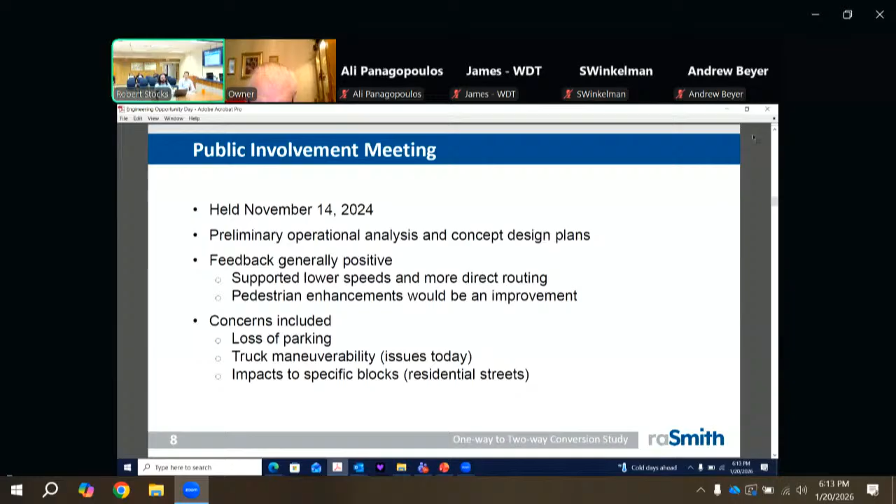I mentioned the public involvement meeting. We held that in November. Again, preliminary operational analysis and concept design plans were presented there. Feedback received at the public information meeting was generally positive, and supported the potential for lower speeds, the more direct routing, the pedestrian improvements. We noted some of the concerns at the public involvement meeting: the potential for loss of parking, truck maneuverability. Some noted issues even today just trying to move trucks on and off between 4th and Main. And then, in general, some of the specific blocks, specifically on the residential streets, that might have some operational changes.

So looking at the existing one-way system, on the map here, everything in green is a one-way street in that study area. And this is showing it's a relatively extensive one-way pair system. But really the takeaway here is that it's discontinuous through that system. So you've got sections that are two-way in between one-way segments, and that's adding to that confusion and the potential for wrong-way movements. I mentioned in one of the previous slides that convert or revert. So the one-way system was originally implemented downtown in the mid-1970s to address what at that time was noted as increased traffic volumes and congestion.

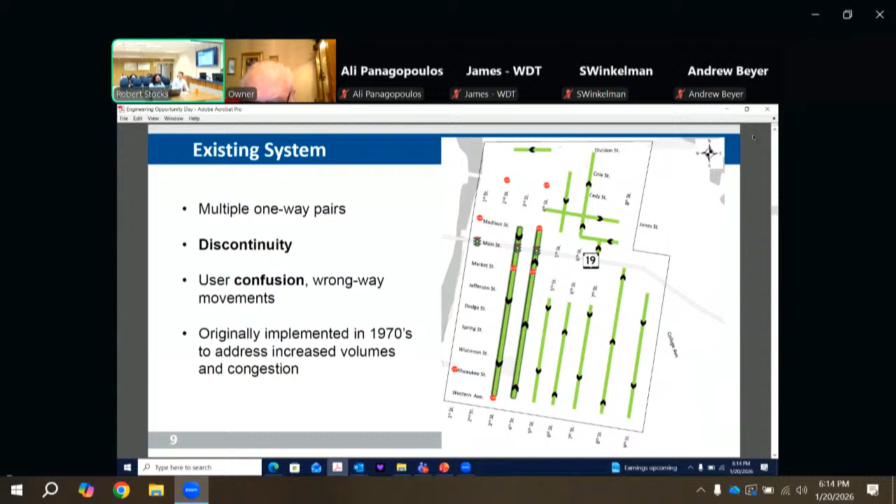So this slide highlights some of the existing daily traffic volumes, and I just wanted to highlight a couple of the locations. So the green lines on this slide are the 3rd and 4th Street corridors and the two signalized intersections with Main Street. So WisDOT, or Wisconsin Department of Transportation, collects daily traffic information and reports it, and their most current information is reporting 8,500 vehicles per day on Main Street, and then 3rd and 4th Street ranging between 1,600 to 2,700 vehicles per day.

But to put that into some context, a typical 2-lane urban street capacity from a daily standpoint can be between 6,500 and 10,000 or more, just depending on the specific cross-section. The more parking and traffic calming, that kind of stuff is going to reduce that capacity, but typically that's kind of the range you're looking at.

Also for comparison, like 1st Street, Cady Street, some of the existing two-lane roadways, they're carrying between 4,000 and 6,000 vehicles per day. So what we're kind of taking away from this is that 3rd and 4th Street are significantly underutilized today for multi-lane roadways operating as a one-way pair.

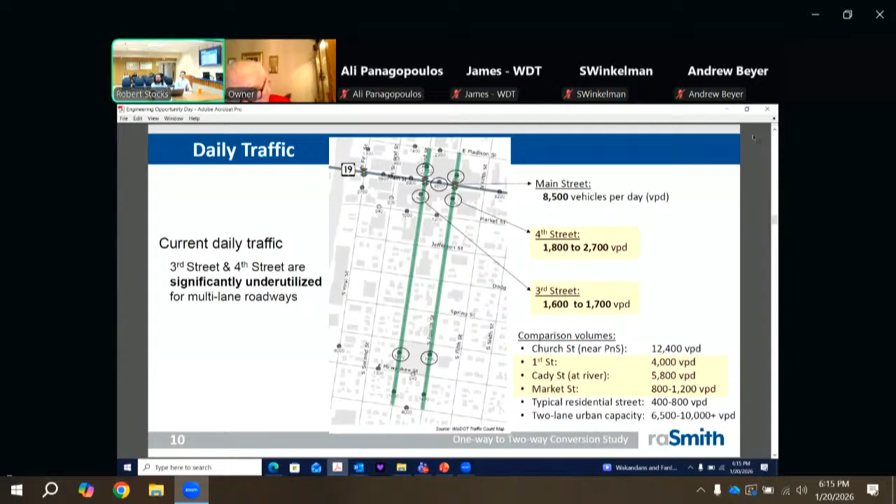Another note on the daily traffic. So we worked with the state to pull historic data. Again, they collect data every 3 years or so, but they had data dating back to the late 1960s here. So this is showing a few data points. Down here on the bottom right is Main Street, kind of since 1969 through 2022, and then the other locations are on 3rd and 4th Street.

And kind of the takeaway here is just from about the early 90s when the traffic volumes peaked, there's been a downward trend since that time, and volumes today out there are about one half of what they were from that peak period.

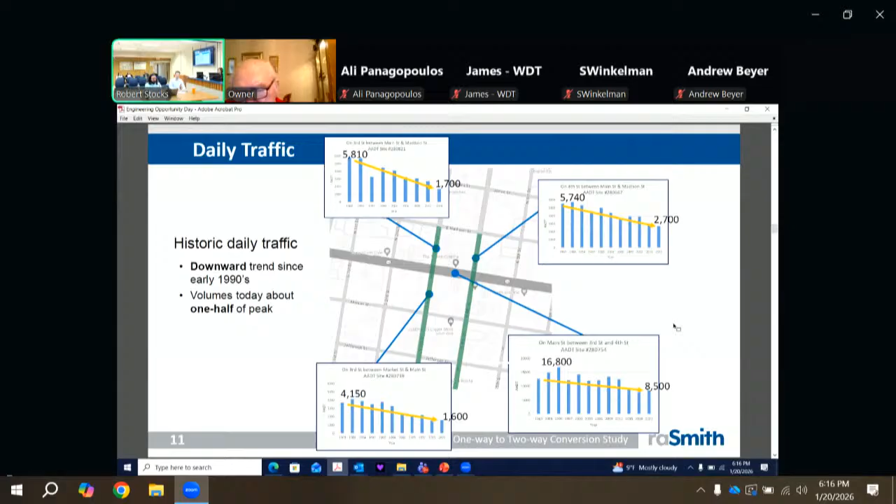Also part of the study, we conducted a crash analysis in the study area. Again, more detail in the report, and we can revisit anything you need questions on, but a couple maps just pulled from our crash evaluation. So the one on the left is a dot diagram of all the reported crashes during the most recent 5-year period when data was available.

There were 331 crashes reported, and the most common crash type was what we call an angle crash, or a turning vehicle colliding with a through vehicle or another turning vehicle. So potentially pointing to, again, kind of those additional turn movements that people need to take with the one-way system.

The figure on the right is showing a few specific crash types. So the orange dots are head-on crashes, so front-to-front vehicle crashes. There was one reported on 3rd Street and one reported on 4th Street, again, potentially with wrong-way movements. The yellow and blue dots are pedestrian and bicycle crashes during that period of time. Not a ton reported, but they are happening within the study area.

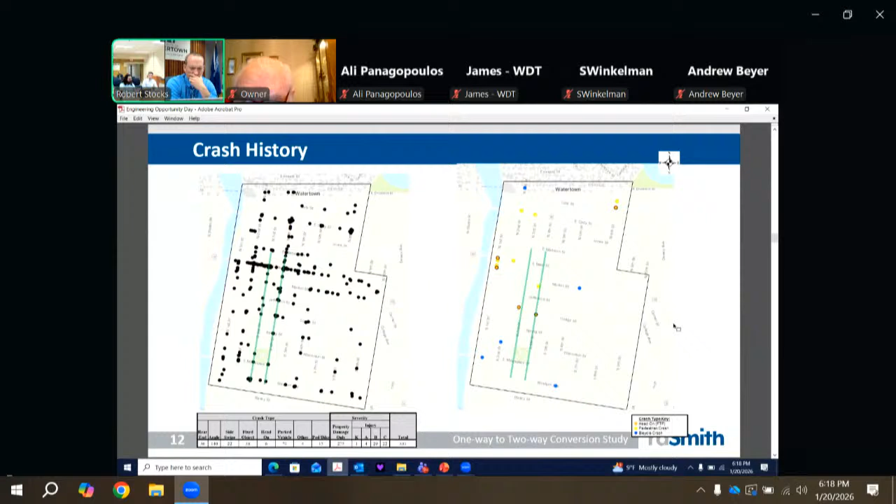So I mentioned the kind of more complex nature of 3rd and 4th Street, which required a more detailed operational analysis to test that two-way configuration. And specifically, we were looking around the signalized intersections on Main Street, kind of one block north and south, and then a few blocks east and west on Main, to really kind of nail down what would that operational condition look like under two-way configuration.

We utilized the Highway Capacity Manual, or what we call HCM, the nationally recognized methodology for operational analysis, and Synchro traffic analysis software to conduct the analysis. And as I said, trying to stay high level, but the models, the analysis is showing acceptable operations on 3rd and 4th Street as two-way. And we did do surplus capacity tests as well.

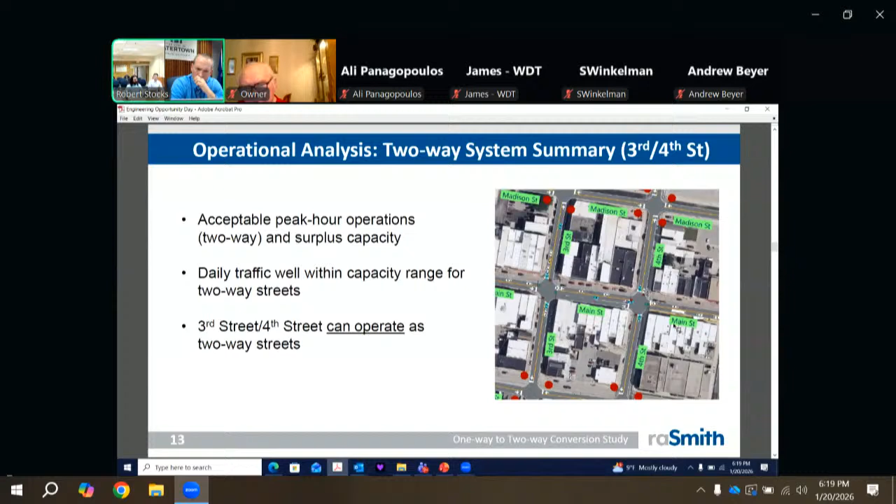So we took the volumes that were collected, redistributed them to two-way, and then increased them 15%, increased them 25% to kind of stress test that system. And we were finding even at those increased levels, there was still acceptable operations. So expecting surplus capacity if those volumes do kind of rebound in the future. And I mentioned the daily traffic is well within those capacities for two-way streets.

Diving into a little bit more detail, this shows kind of a by-movement operational analysis at the two signalized intersections with 3rd and 4th. The Highway Capacity Manual reports based on a level of service. They give it a letter grade between A and F, and it's associated with an amount of delay. So how many seconds of delay does it take to move through an intersection?

And there's a chart there on the right that kind of correlates those delays to a letter. And just generally industry standard here, we consider level of service D as acceptable, D or better. So here we're seeing all levels of service are C or better under the two-way configuration.

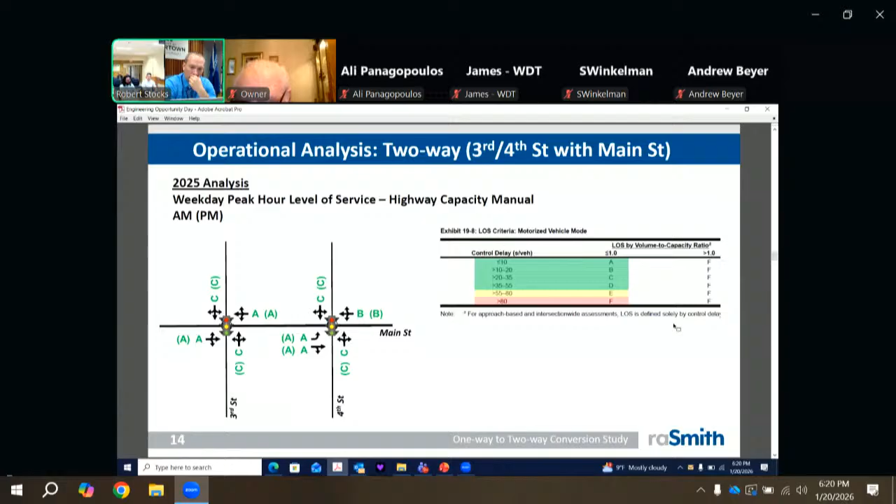All right, so we had mentioned the three alternatives we had looked at for left turns. We also utilized simulation software to help us with this left turn evaluation. Today, Main Street doesn't have left turn lanes except eastbound at 4th Street, so traveling east to north from Main to 4th, there's that full block length of left turn lane. Otherwise, there are no left turn lanes on Main.

And the HCM methodology doesn't really fully capture that short-term impact, so that's where the simulation helps us. And we were looking at what those trade-offs are. If we provide additional left turn lanes, it's going to improve traffic flow and reduce queues, but that's going to come at an impact to the cross-section, right? We're going to have to find space to add additional lanes, and that would impact parking.

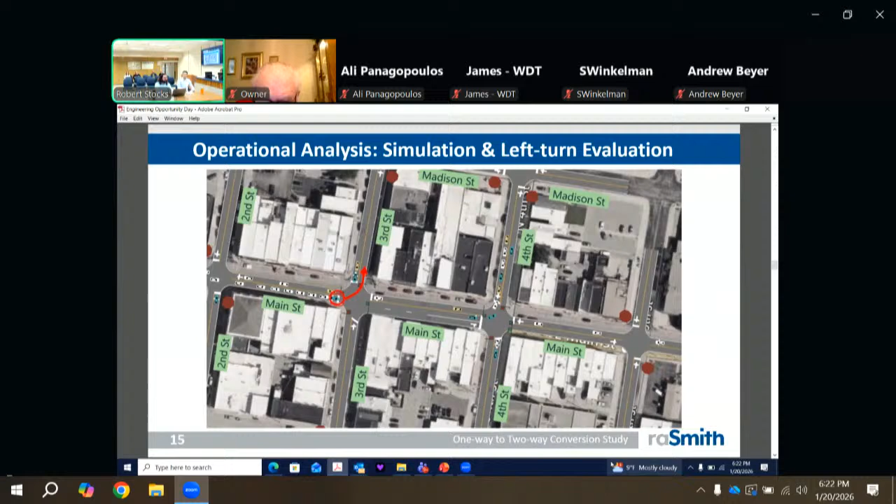So takeaways here. Between the two signals, specifically westbound heading from 4th Street to 3rd Street on Main, we're seeing queues that fill up about 80% of the available storage internal between the two signals. And then looking at what I'm calling external to the two signals, so westbound on Main Street from 4th and eastbound on Main Street from 3rd, those queues are backing up to or through the 2nd Street and 5th Street intersections. This alternative has the longest queuing reported, but it doesn't impact any additional parking.

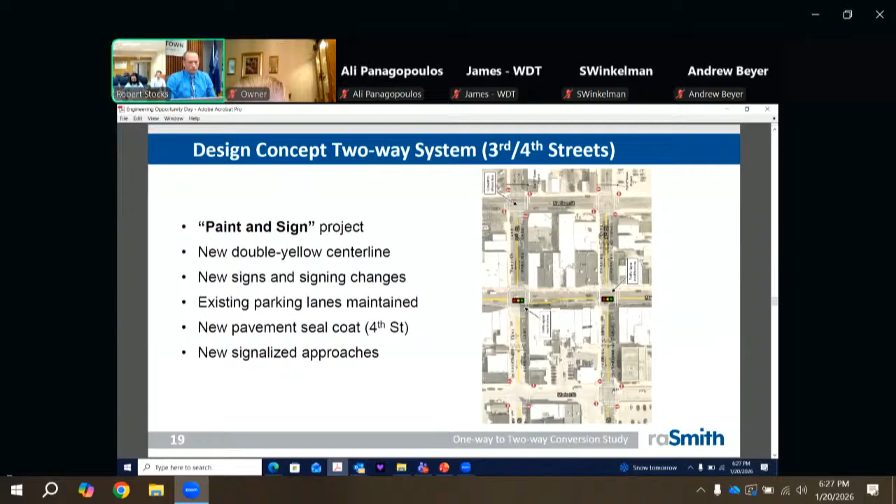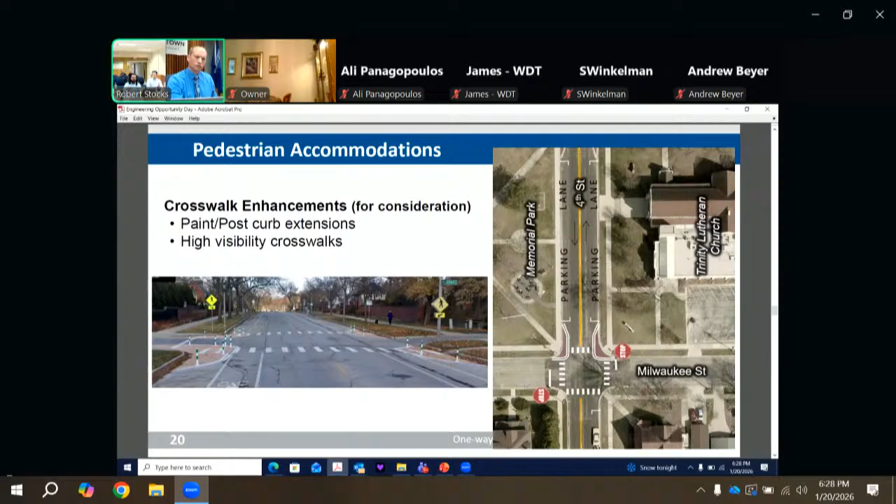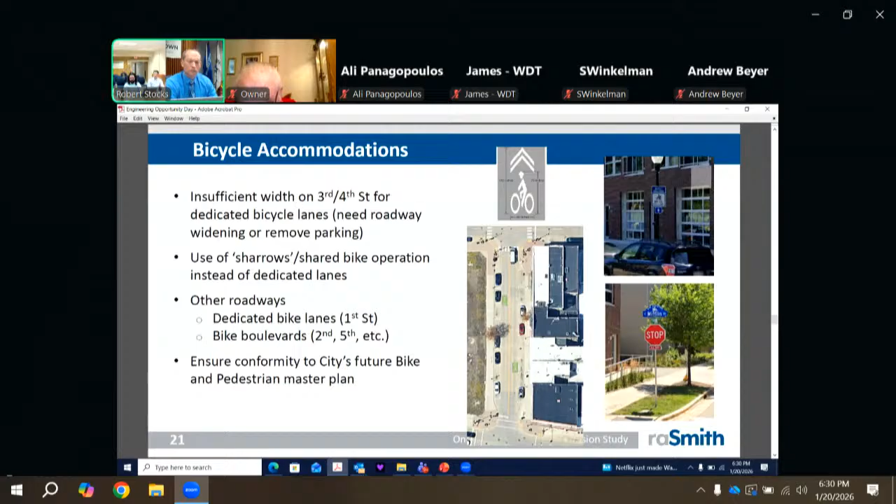So we looked at some other potential options to provide that north-south bike connection, and it could be looking at dedicated bike lanes on other streets. So like 1st Street has a wider cross-section, could be an alternative, or looking at some of the residential streets, so 2nd, 5th through 8th. Do those get dedicated as what we call a bike boulevard? So it would be signed and marked as bicycles having the right of way to provide that connection between like Western and Main. But again, provided to the city for consideration, but any changes, any additions would need to conform with the future ped and bike master plan.

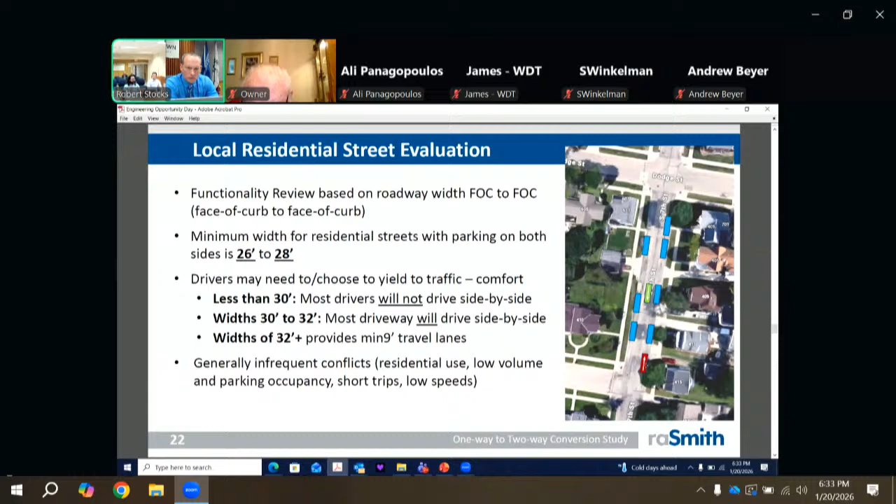When you hit that 30-foot width, between 30 and 32 feet, I should say most drivers there will drive side by side. It's narrow, they'll go slow, but there's enough space for most drivers to go side by side. When you get to widths of 32 feet or more, then you've got enough space for 7-foot parking lanes and 9-foot travel lanes. And drivers would treat it as a normal two-way street.

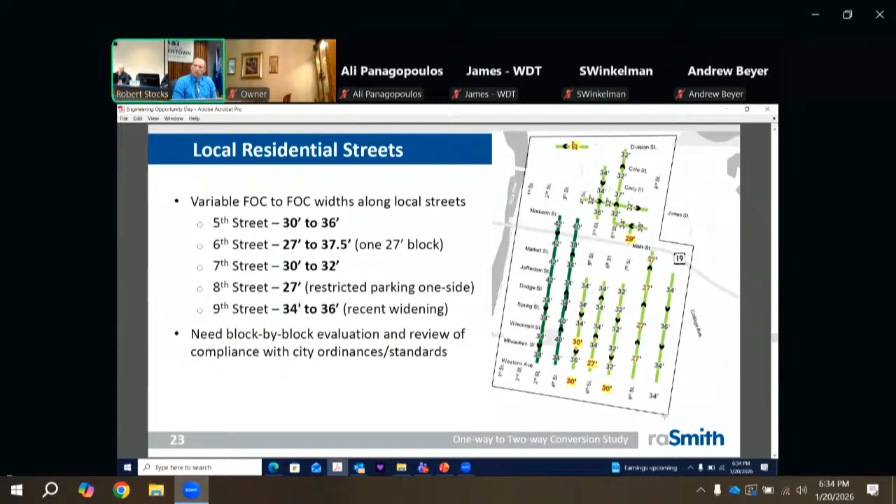Just a minute here, if you could, please. Yep. But where you have like 30 to 36 or 27 to 37, are you saying on that street at different points it has different variance in width? I don't quite follow the range you're referring to. Because I know we have streets that are wide and narrow depending on where you are on the street. Is that the example there of that street?

Yep, so like 5th Street, what I'm saying here is the widths vary between 30 feet and 36 feet, depending on which block you're on. Between Western and Milwaukee, the width is 36 feet. But between Milwaukee and Wisconsin, the width narrows to 30 feet. And then Wisconsin north, it's 34 feet. So there's not consistent width as you're going north to south.

So like I said, on the whole, there's 32 feet or more for most of these block segments. And they would be able to operate as two-way streets with a little bit more narrow conditions. And parking on both sides. Parking on both sides, yep. So in these narrow sections where it's 30 feet or 27 feet, you would probably see more drivers choose to not drive in opposing. They would wait at the end of the block, or if there's an open parking spot, they'd pull over and wait there.

One of the benefits here, the street blocks are pretty short in this section. They're only like 200 feet long, so it's not like you'd need to wait 45 seconds for a car to clear it. They can clear through the intersection pretty quickly. And there's not enough ability within that boulevard or right-of-way to try to make it consistent on a certain width? You don't have that latitude or that option?

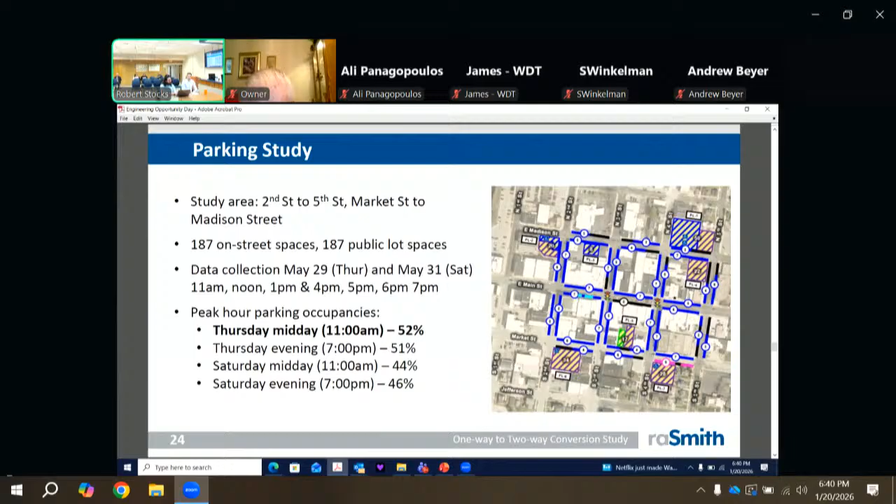And then in the evening, more of the restaurant, entertainment type business, people trying to park right in front of those businesses, and the 2-hour restrictions aren't in place on street. So during the evening, a lot of the lots are underutilized.

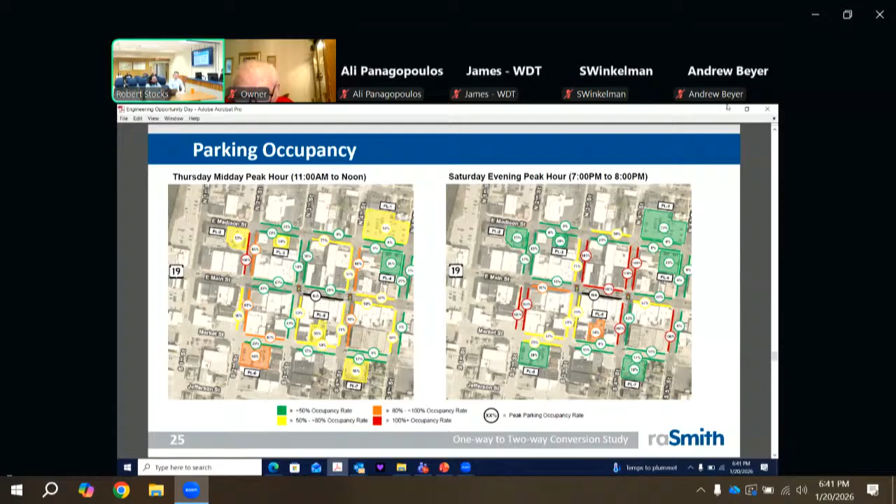Okay, so a couple slides with just kind of an overview of the recommendations. So based on the analysis and the concept designs, the study is recommending converting 3rd Street and 4th Street to two-way streets with one through lane in each direction.

For the 3rd Street and 4th Street intersections with Main, we're recommending option number 2, which had the 1 additional left turn lane, basically taking a piece of that existing left turn lane between 3rd and 4th and allowing a piece of that for the opposite direction. So that provides more storage and an opportunity for left turners between those 2 signals, but tries to limit the amount of parking impact.

Generally, the existing signal operation would be similar to today. So the new northbound and southbound movements on 3rd and 4th would basically just operate at the same time as the existing north and south movements. And Main Street would generally have the same amount of time and same phasing, same left turns as it does today. You're just adding another movement north and south that would occur at the same time.

We did recommend one traffic control change at 3rd Street and Madison, so just north of Main. That operates as a one-way stop today. We recommended an all-way stop there due to some sight distance limitations. The buildings are pretty close on the corners. Adding the new northbound movement created some conflicts. I mentioned the seal coat, and then some of the considerations from the pedestrian, bicycle, and that local street conversion potential.

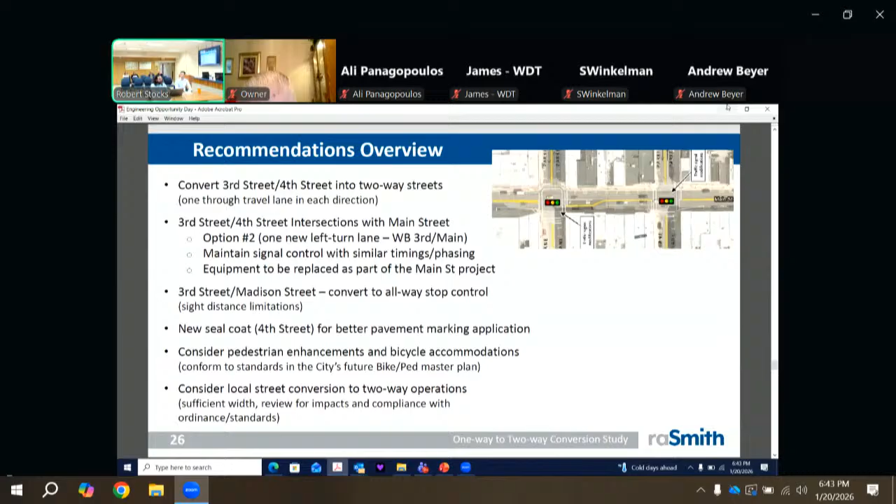High-level cost estimates for the 3rd and 4th Street conversions were $175,000 to $225,000. That includes some assumptions, removal and installation of all the pavement markings, installation of signs. It was assumed that city staff would remove the existing signs and posts, so that cost was not included. The seal coating was included. We did include select applications of the high visibility crosswalks and the paint and post curb bump outs. Again, something that could be refined as part of the design, but that is included in the cost.

Temporary traffic control and staging to accommodate the conversion. And then any of the Main Street roadway work, the signal work, so obviously with new movements, you're gonna need new signal heads, pedestrian heads, all of that work would be encompassed into the state project. So that cost is not reflected in this cost estimate.

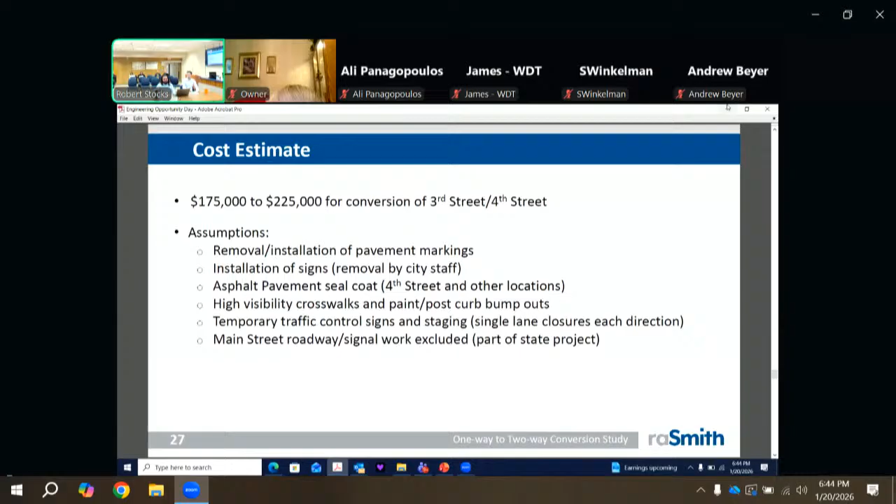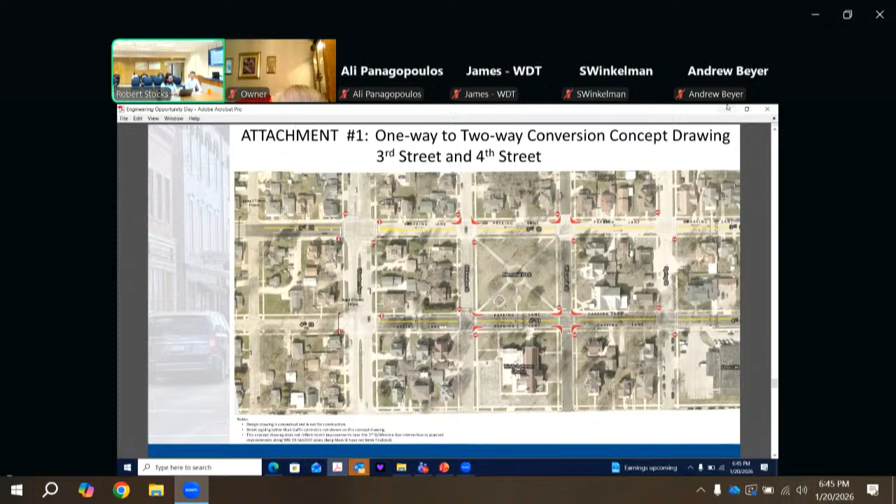All right, just to note here, the last couple attachments that you have is a concept drawing. This isn't a final plan, it's not for construction, but just to give you an idea of what those pavement markings would look like under 2-way operation. So it's split south and north here. You toggle between the two, but it gives you something to reference on what that conversion would look like from a marking standpoint.

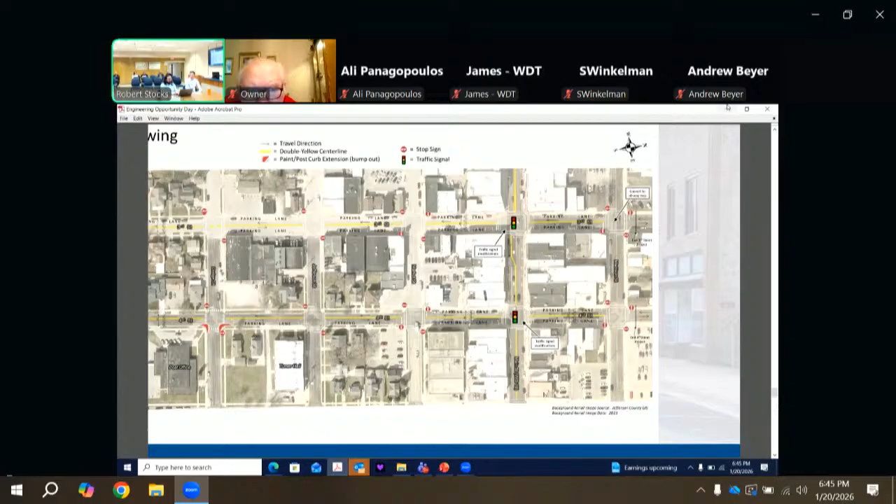That's all. Went through a lot of information, but is there anything we want to revisit or any questions? Before questions, Nathan or Andrew, is there anything you want to share at all?

I'll reiterate what was in the packet. There was a decision point a year and a half ago based on the preliminary results to convert 3rd and 4th Street from Madison to Western to 2-way in 2028 as part of the state project. And the driver there was really the state's design. They needed a decision to be made on bump out locations at 3rd and 4th Street, and then signal design. If we convert to 2-way, more signal heads would be needed. So that's already been in the works for a little bit now with the state's design. Nathan, I don't know if there's anything you'd like to add.

Okay, I'll open up on the other side first. Anybody on my left? Or Myron, if you want to ask first? Mr. Arnett, looks like you have a question. Just a couple questions, a couple comments. So first, this has been on my list for 15 years from being prior chair of Public Works, so I'm very glad to see it potentially moving forward.

A particular couple questions. Did you also look at the intersections of Milwaukee and 3rd and Milwaukee and 4th in terms of potential 4-way signage? Yes. We did look at those. We had to delay collecting traffic counts there due to work that was going on at First Street and Western, so that came near the end. But we collected data there, and we recommended to keep those as two-way stop. They didn't meet the all-way stop warrants, so the volumes needed to justify that all-way stop weren't meeting published thresholds. And we ran operational analysis as well and found the two-way stops would operate acceptably.

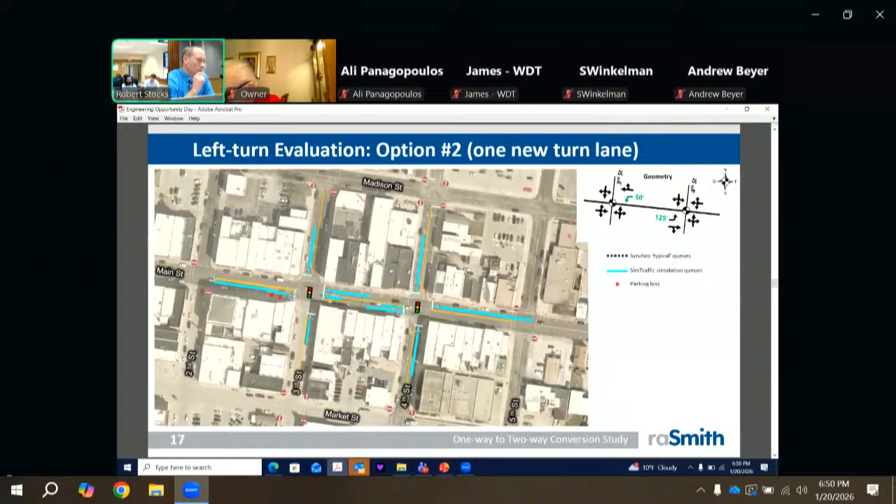Yeah, I would think potential for the cross-section design would change, just looking for that extra width. And there is the pocket there. I think it would be on the west leg of 3rd Street. Trying to just get that eastbound lane alignment where you kind of have to point the travel direction down. So if you have to come back and do this change later, does that impact the curb bump out or parking or something on that approach there? Okay. So there'd be potential that the design would have to change.

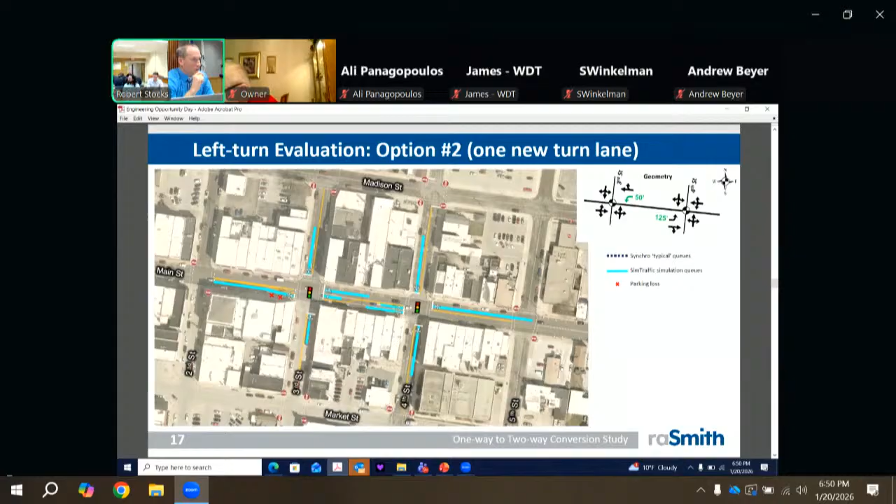And lastly, I just have a comment with regard to the pedestrian accommodations. Big fan of the hashed crosswalks. Total not fan of bump outs. I think it's about the worst idea that's come up in the last 30 years. So I would just avoid those at all possible costs. Just my perspective. Thank you.

Thank you, Mr. Arnett. Okay, Mr. Smith? Myron, you have any questions? I don't think so. Okay. Mr. Blanky?

So I echo many of Alder Arnett's sentiments, but I won't go through and reiterate all those. I do have one question. With a dedicated turn lane, does that come with a dedicated turn signal automatically? All right, sorry. So for the new turn lane, no, that would just operate what we call permitted left turn. So there would be no arrow westbound at 3rd Street, where the new turn lane would be under option 2. Yes, sorry, my question is in direct to the recommendation of option 2.

Yeah, so the protected permitted left turn that's there today, that arrow eastbound on Main to north on 4th, would remain as it is now. And there would not be a left turn arrow for the 3rd Street approach. It would basically just be providing a 50-foot left turn lane for vehicles to store while they're waiting to turn. And really that was based on just the anticipated traffic volume. So the eastbound to northbound 4th Street volume is double what we were expecting for the 3rd Street left turn. So the left turn phase would be needed to handle that at 4th Street, but was not needed to handle traffic at 3rd.